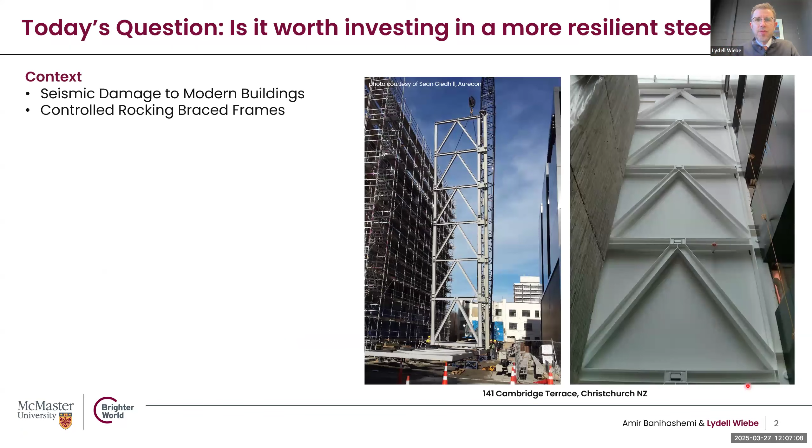The way I'm planning to look at that is first to provide a little bit of context, looking at what we expect for seismic damage with modern steel frame buildings, and a bit of a crash course on controlled rocking braced frames. I imagine many of you will not be familiar with them yet. Then I'll go into the method for this paper, the design archetypes we used, the modeling assumptions, and how we looked at repair cost. Then I'll dive into the results on structural performance, the seismic losses from both an intensity-based and a time-based perspective, and overall this cost-effectiveness question, before wrapping up with some implications and a shout-out to some related work.

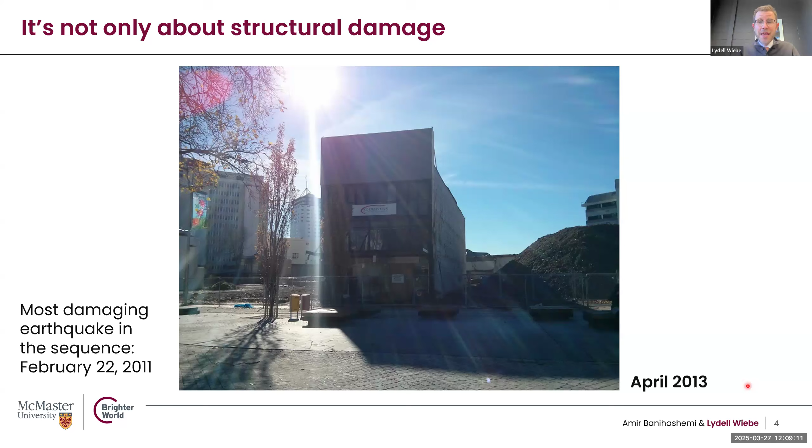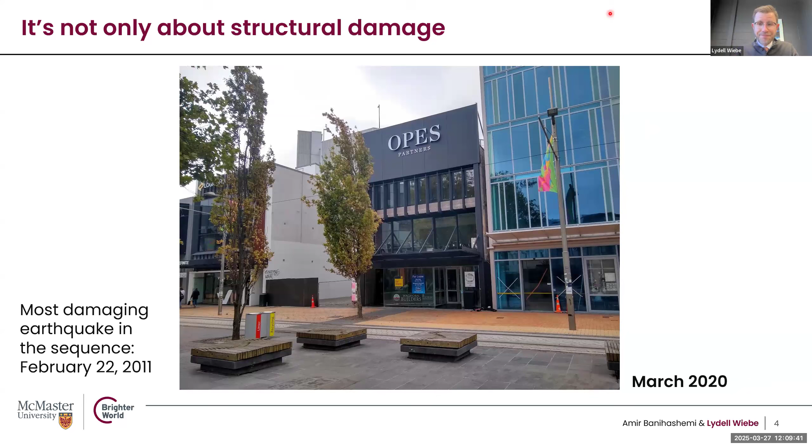I'm guessing now it's finally occupied. But just to drive this point that it's not just about the structural damage, we need to be thinking about more than that. Even though if we are thinking about structural damage, there's been this push for many, many years to look at more resilient seismic force resisting systems.

I picked a few of the many references that I could here. Base isolation, which is not the focus here, but I do want to mention it's also a really important way of looking to enhance resilience. Goes back at least 40 years. If I'm talking about rocking, which is the focus for today, back in the 70s, there was work in New Zealand about applying it to a rail bridge. There was a bunch of tests that were done in Berkeley.

The PRESS project was done in the 90s and kind of was a bit of a renaissance of these rocking systems. And so it's not particularly new, but it still hasn't quite gained full traction. And so we wanted to look at it here. To summarize how it works, I'll look here at a controlled rocking steel braced frame because our focus in this paper was on steel systems.

The idea of a rocking system is you're actually going to let the seismic force resisting system partially lift up from the foundation in response to earthquake load. So if we look at a structure like this, and I plot the force displacement curve, initially, if you start loading it up, it'll deform like any other braced frame until you overcome the pre-compression of the column. It doesn't know it's a rocking structure.

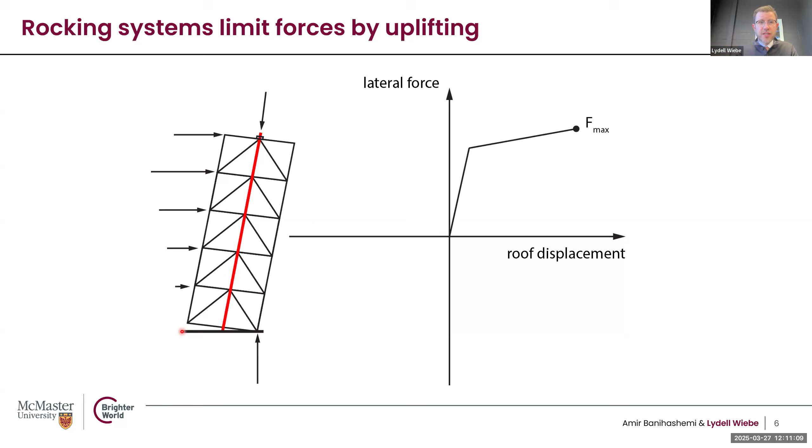But eventually you reach the rocking load, and at that point, when we reach zero force down there, now it's ready to start rocking. As you continue to push it, it will start lifting up from the base. That'll cause a softening response. And this positive stiffness would be contributed by post-tensioning. You don't always need post-tensioning, but it's commonly used in these controlled rocking systems, at least from a research perspective. The ones that have been built probably are more commonly without, but still plenty of examples with post-tensioning.

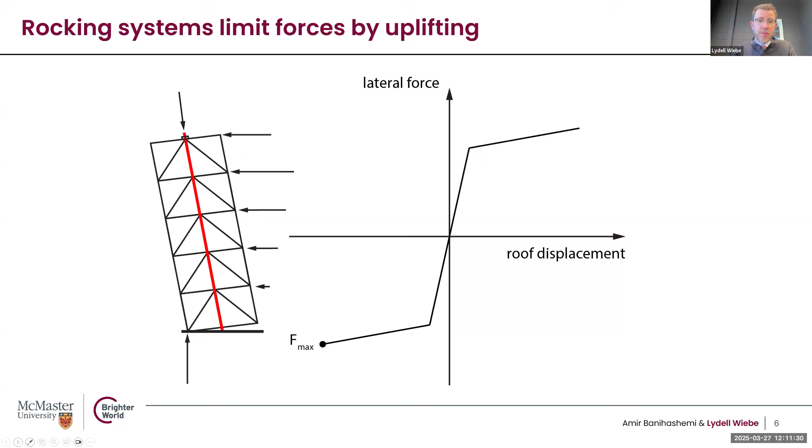If you unload it and go back in the other direction, you get this bilinear elastic response, which is characterized by this self-centering, where whenever the force is zero, the displacement is also zero. This as it is doesn't dissipate any significant energy. And so typically people will provide some form of supplemental energy dissipation that's activated by the rocking to enclose some area in the hysteretic loops. And so we get this characteristic flag-shaped response.

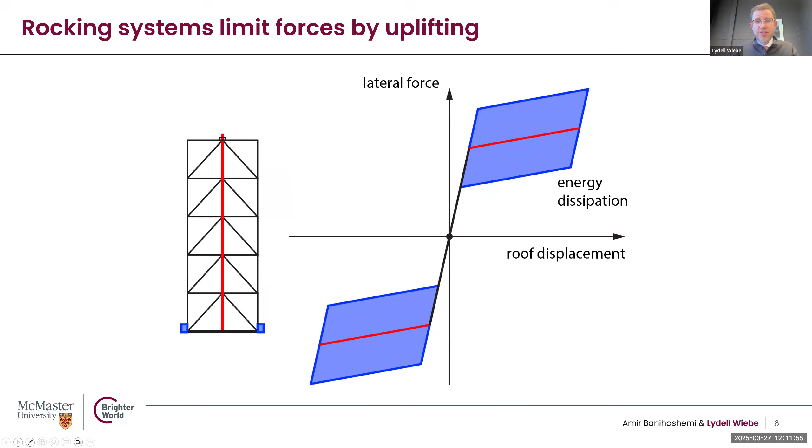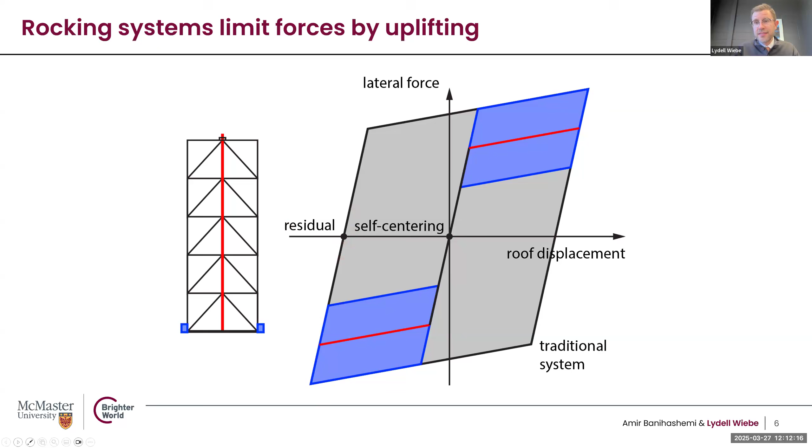If we compare that to a more traditional, more ductile system, which is what we're comparing in this paper, the energy dissipation that you'll see per cycle is quite a bit less. But we get the advantage of having this self-centering, whereas a more ductile system, if you unload from the peak drift, you're going to have a locked-in residual drift, which we associate with needs to demolish the structures.

As an example of this, I thought I'd show a video. This video is getting old at this point. This goes back to my PhD almost 15 years ago now. But this is shake table testing that was done. In the middle, you see the overall view of the 3-story frame that we tested at 30% scale, close-ups of the two corners. So you see it lifting up from the foundation.

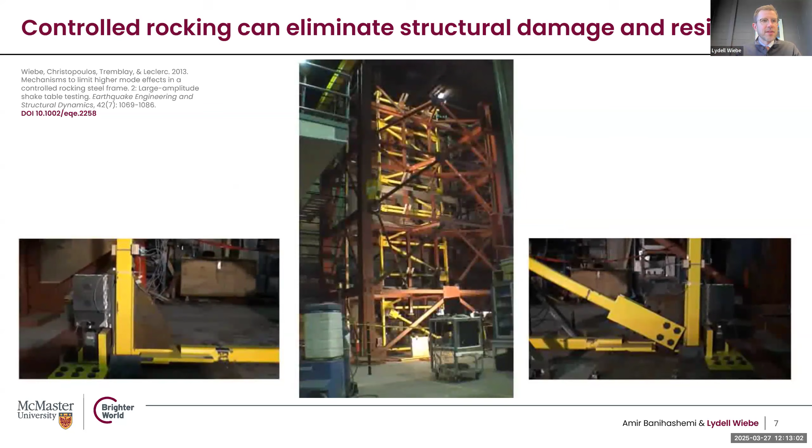For the test that we ran here, we used friction-based energy dissipation. You wouldn't have to do that in practice. Anything that'll dissipate energy should do the job. But this rocking response is softening things, but in a way that's not associated with damage. And so we can get the advantages of the nonlinear response without needing to have the structural damage that is typically associated with it. These have been built.

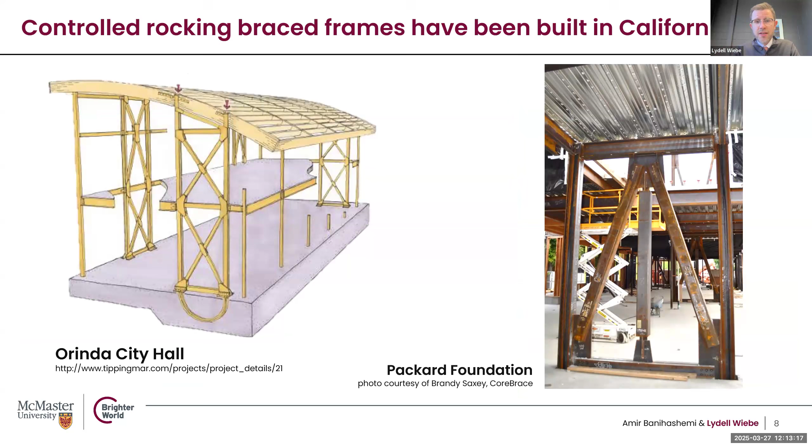In California, a couple of examples: Orinda City Hall, just kind of east-ish of San Francisco, designed by Tipping Mar, uses a rocking system. The Packard Foundation as well uses controlled rocking. In New Zealand, there are a number of examples as well. Two of them that I picked for this slide are Te Puni Village in Wellington and 141 Cambridge Terrace in Christchurch. Te Puni was built before the Christchurch earthquakes, but not really affected by them. 141 Cambridge Terrace was built afterwards. So the question of how it did during the earthquake is not something that we really know the answer to yet.

But they have been built. They're not codified, and so they're not common. Now, one of the things that people often wonder about is this impact that you have as the system is lifting up and then it feels like crashing back down. And as far as we can see, both like from the video that I showed you, we went looking to see the impact of that, forgive the pun, the impact of impact in that case. But it wasn't anything really significant.

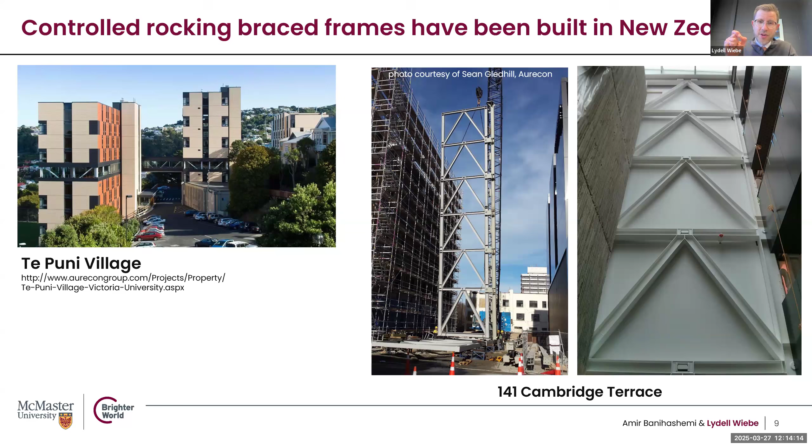You can see very large accelerations right at the point of contact, but those had dissipated by the time you reach the floor masses. Where we do start seeing some accelerations is more actually influenced by the higher mode effects, that just like a reinforced concrete shear wall, when you form this moment hinge at the base, that doesn't fully cut off the higher modes.

So this was some work done by another student a few years ago, looking at the floor spectra for controlled rocking braced frames. And what we see in this case is the peak accelerations were maybe a bit higher. And then we can have these large spectral peaks in an analytical model. How much that translates to a real system, I think, is very debatable, but we start seeing it in the model.

And so the question that this raised for us was, okay, we're avoiding structural damage by having a rocking system, but often our seismic losses may be heavily influenced by the damage to acceleration-sensitive non-structural components. And so do we need to worry that we are sacrificing them in order to get the structural benefits that we want? And if so, how does it play out overall? Is this a net benefit? And so that's really what was driving the work that's presented in the paper I'm presenting today.

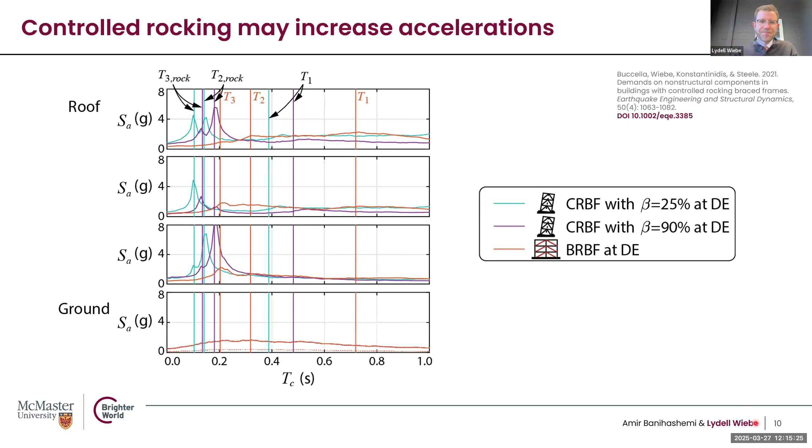So coming back to this question of whether it's worth investing, I'll now switch gears a little bit into the methodology that was used in the paper that's published in Spectra. 4 structural systems that we looked at. So we took one floor plan of a structure. We took it at 3 stories, 6 stories, and 12 stories for a site in Los Angeles with the parameters given there. And then we looked at 4 different seismic force resisting systems.

One of them was a steel moment frame. One was a concentrically braced frame. One was a buckling restrained braced frame. All 3 of those designed according to ASCE 7 using the current provisions. And then the 4th one is the controlled rocking braced frame. It's not codified, so we followed some design guidance that I had developed a number of years ago.

You still need to assume an R value, so it's nothing crazy to design. You're still following an equivalent lateral force procedure like you would for most systems, and we assumed an R value of 8. I think you could push to larger values of R, but we held it at 8 for the study.

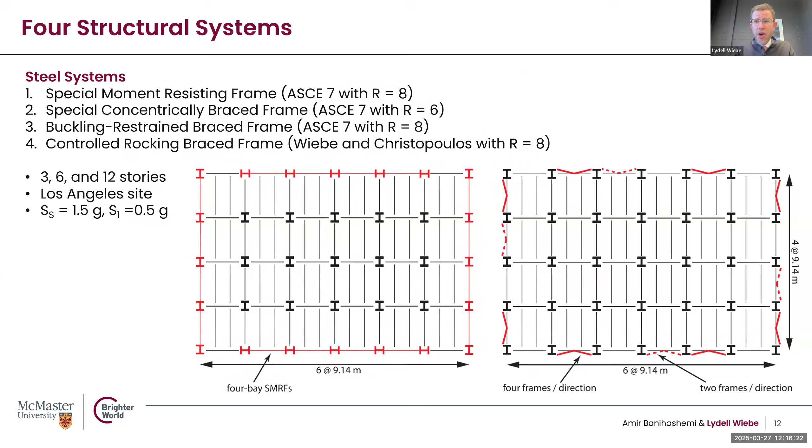Modeling, I'm not going to have time to go into detail because there were 4 different structural systems that all needed to be modeled. But just to highlight that it was all done in OpenSees, using reasonably advanced models that are trying to capture all the way to the level of collapse. So we've modeled things like fracture of braces, deterioration of beam column hinges, panel zone action, all of these things included in the models, and those are validated, but I won't be able to go into much detail on them today.

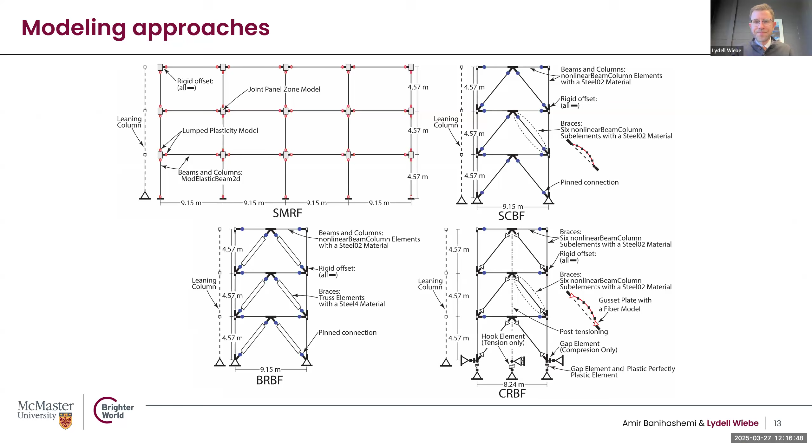In terms of estimating repair costs, we follow the P-58 methodology. The numbers available there are 2013 dollars, so these numbers are probably pretty low by today's standards, but $250 a square foot for the moment frames, $175 for the 2 different kinds of braced frames. And then there's a question of what do you assume as a construction cost for controlled rocking?

We assumed 2% more than the BRBF, which might be lower than you might expect, but honestly, from talking with the people who have designed the ones that have actually gone up, it's very hard to do a cost comparison without an actual project, but generally they're talking a couple of percent maybe, and in some cases even cost neutral to be able to use a controlled rocking system. This is not an astronomical cost increase, and so we thought 2% would be, if anything, probably on the high side of what the construction cost would be.

In terms of evaluating damage along the way, the fragility functions are mostly taken directly from the updated P58 database with a couple of further modifications. Demolition conditioned on residual drifts is an important consideration. We took a median residual drift for this study of 1.5%. That's higher than the default in P58. It follows another reference, largely because we didn't want to overly penalize the systems that we're comparing rocking to. So this is probably actually less favorable for rocking than a different assumption that you could make.

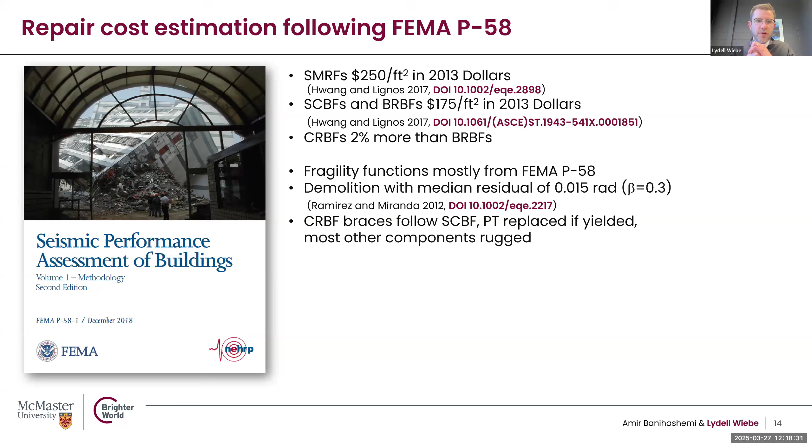For estimating damage to controlled rocking braced frames and how you would quantify that, the fragility functions there generally are following a concentrically braced frame, accounting for the fact that story drift is more coming from rigid body motion for a controlled rocking system than for a conventional braced frame. So that's captured in the model. And then the computations, most of them were done using Pelicun, out of the NHERI SimCenter. So that was our main computational engine for the work. For the loss assessment work, the actual analysis was all done in OpenSees.

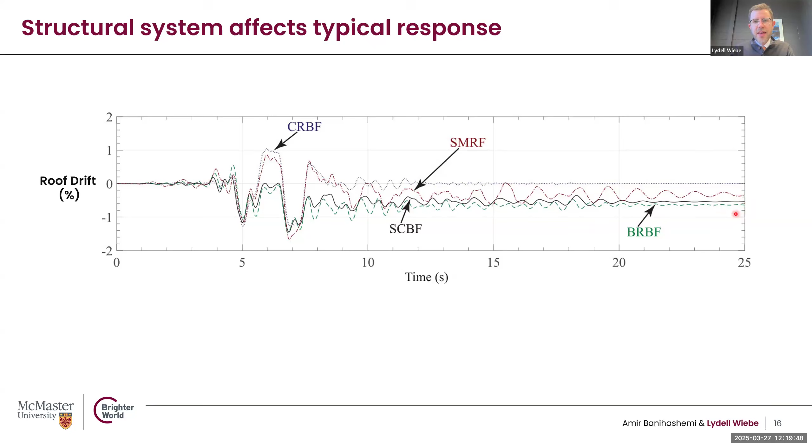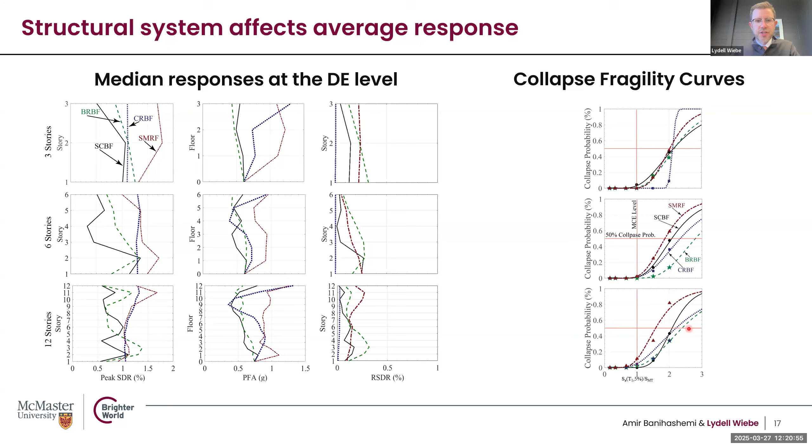Peak floor accelerations, it surprised me a bit, actually, that the moment frames were reaching the largest accelerations overall. That was generally because they were drift limited in design, which meant that the forces were not capped in the same way for the moment frames as they were for some of the other systems, and force is mass times acceleration. So if the force wasn't capped, the acceleration wasn't either. The residuals were essentially 0 for the controlled rocking system, and not huge at the design earthquake level, but still noticeably larger. And if we look at the collapse fragility curves, the vertical line here is showing the MCE. We're generally less than 10% probability of collapse. That's what you would expect and hope for. And then the collapse margin ratio is what you would expect.

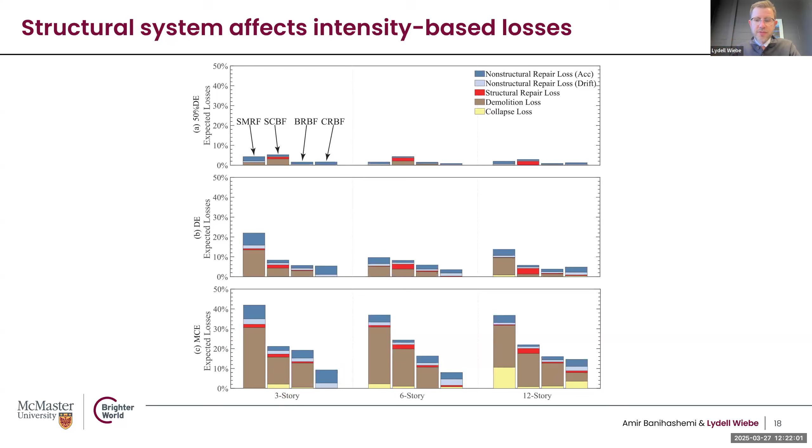Also, kind of as expected, the acceleration sensitive non-structural component losses are typically a bit more for the controlled rocking system at all intensities, but that cost is more than outweighed by the savings in demolition costs for the case where you have large residual drifts. And then if we integrate that through the hazard curve to look at time-based losses, what's shown on the y-axis here is the expected annual loss, we see the same trend where we have the least for the controlled rocking braced frame.

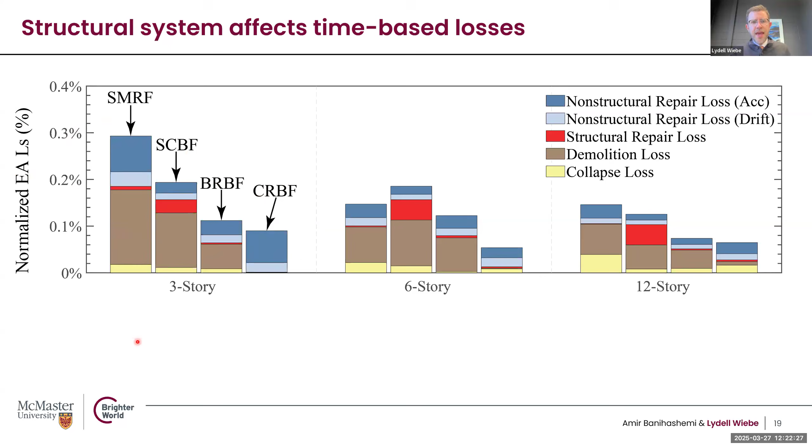None of these numbers are all that large, but it's lowest for the controlled rocking system, where some increase in acceleration-sensitive non-structural component loss is more than outweighed by the savings in demolition and, to a lesser extent, collapse losses. Then we also looked at kind of a cost effectiveness ratio.

And what we see is that in general, there are some savings. These are not huge savings. There are other higher risk endeavors that you could take to make more money, but it's coming out positive over the lifetime of the structure. This is a net win.

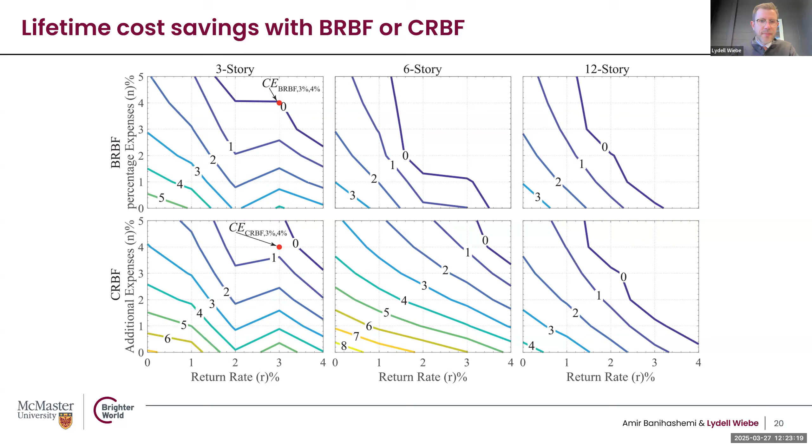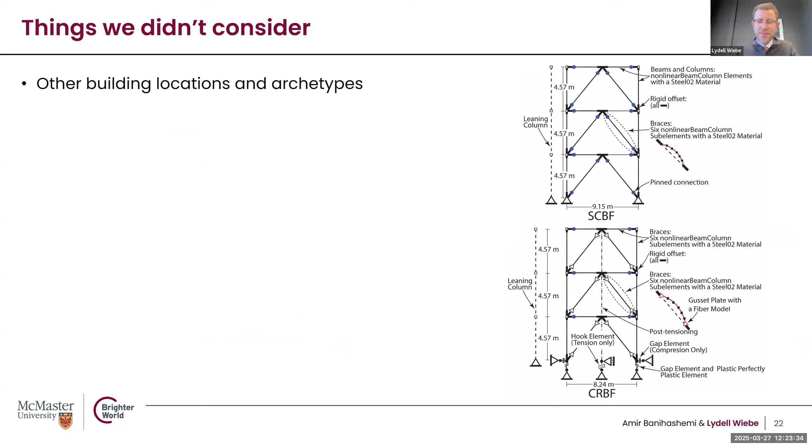So revisiting then this question of, is it worth investing more in a more resilient steel seismic force resisting system? Before capping that one off, I do want to highlight things that we didn't consider, because there were lots of them. We looked at one building location and archetype, 3 different heights, but one floor plan. We didn't look at modeling the gravity framing, which tends to reduce the residual drifts that you have. It's in there for P-delta effects, but not for the effects on the lateral resistance. We had one damping model that we had to assume.

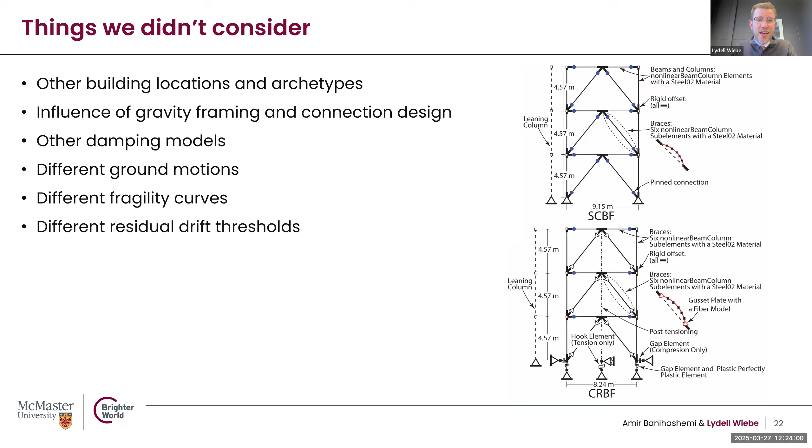We have one set of ground motions that are probably a little bit on the high side relative to a conditional spectrum. The fragility curves are all baked into FEMA P58. Those are questionable. The residual drift thresholds, again, that's an assumption. So there's lots and lots of pieces, consequence functions as well. And one time horizon; we assumed 50 years.

And then one that I really wanted to highlight is indirect losses. All of this is based on the direct cost of repairs as estimated according to FEMA P58. But often it's the time that you're out of the structure that is more important than the repair cost. And so that's something that's not included in this study.

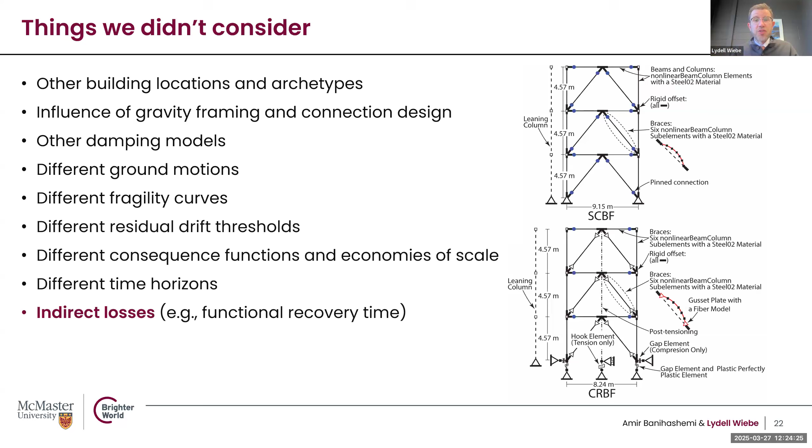But with all of those caveats, is it worth investing in a more resilient steel seismic force resisting system? My one-word answer would be yes. I think that the controlled rocking systems can be cost effective in the long term. And we didn't know that going into this. We honestly were not sure whether potential increases in acceleration-sensitive non-structural component losses would outweigh the benefits. And it seemed that things were looking good for resilient systems here.

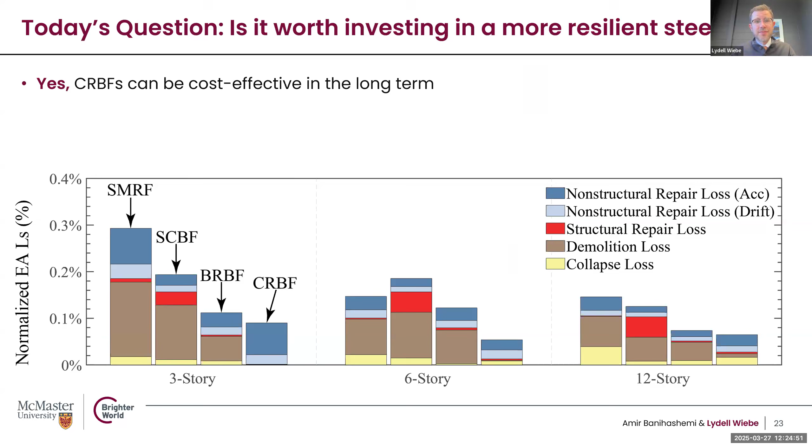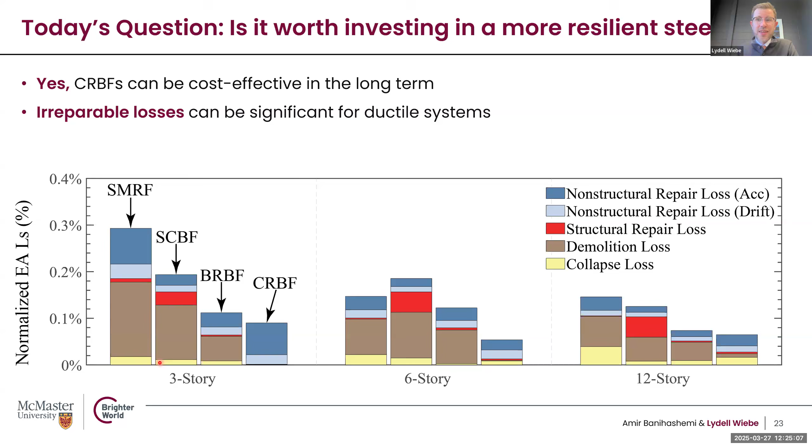But I do want to highlight the irreparable losses, what we called demolition and collapse. Those are things where you can't fix non-structural if you have to demolish your structure. And those can be very significant for the ductile systems, even if it's in a very large earthquake. Over the lifetime of the structure, that can be significant.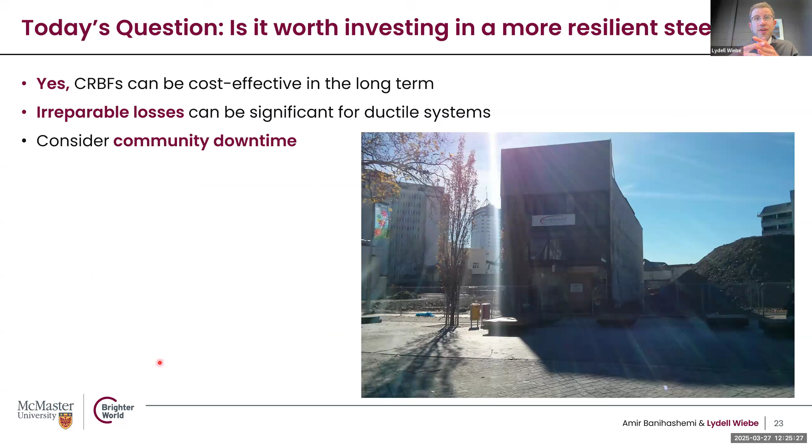Just before wrapping up, one last thing that I wanted to highlight. If you were interested in this paper, I'd like to highlight a couple of other papers written by the same authors, with Amir and myself. In one, we took a similar methodology and looked at the lots of dials that you can turn on the design of a controlled rocking system, looking at how you would optimize them to reduce the losses.

There's another paper here looking at how our fragility curves for acceleration-sensitive non-structural components are all based on the peak floor acceleration. But as a structural engineer, I use the peak floor acceleration for almost nothing. Usually I am using a spectral acceleration. And so applying that thought process to our fragility curves is a paper that we published as well in EESD. And then finally, getting into the weeds on consequence models in FEMA P58 and economies of scale there.

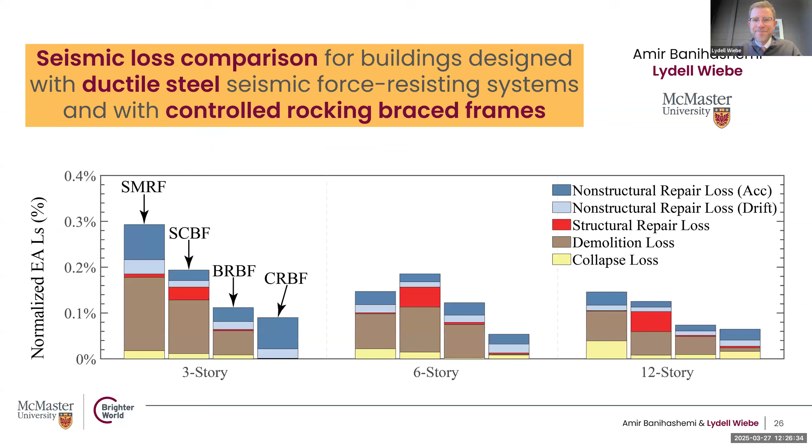Thanks so much. Thanks, Lydell. Awesome job there. And thank you for sticking to the time. Really appreciate it very much.

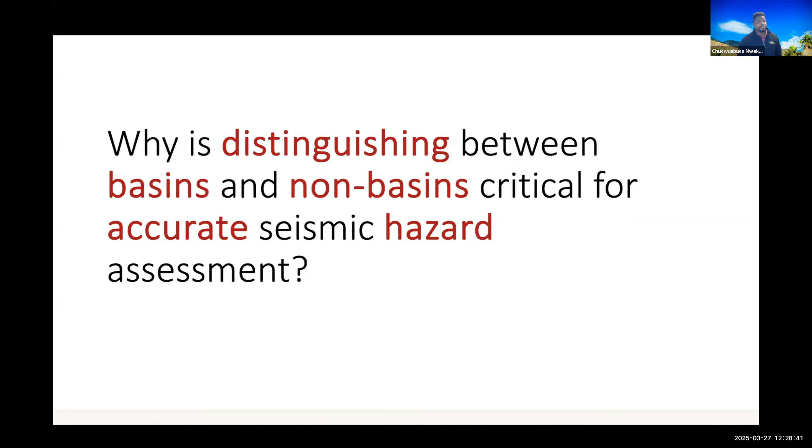So the first question, which is a fundamental question to ask regarding this paper, is why is distinguishing between basins and non-basins critical for accurate seismic hazard assessment? Well, these 2 videos here should provide some understanding of why discerning between basin and non-basin sites is important. On the top right, you're going to see the displacement history of 2 GPS sensors, one in a non-basin environment, which would be a purple circle, and the other in a basin environment, which would be a gold circle.

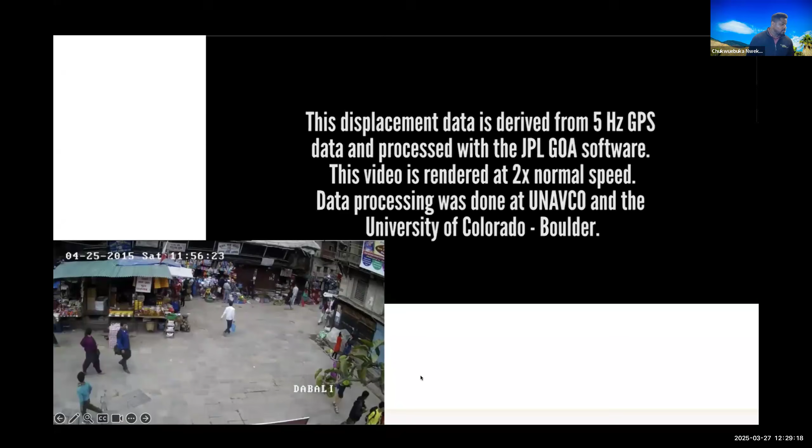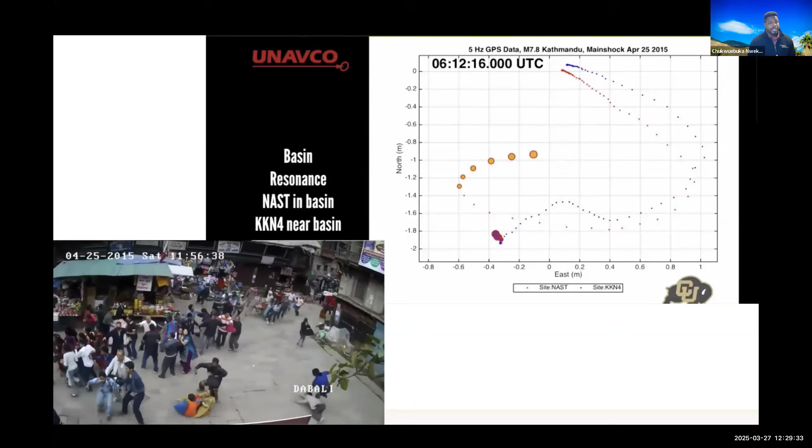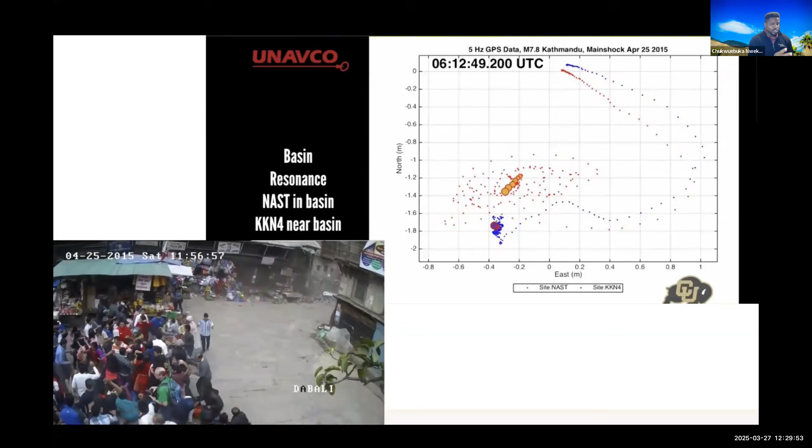And you'll see in the video in the bottom left what that looks like in real life and how that can be quite disorienting. For this video, there wasn't any damage in this location, but not too far away, there was a lot of damage and people lost their lives. But this is just showing you the differences for the same earthquake between two different site conditions. And some of you will ask, okay, what's the cause for these differences?

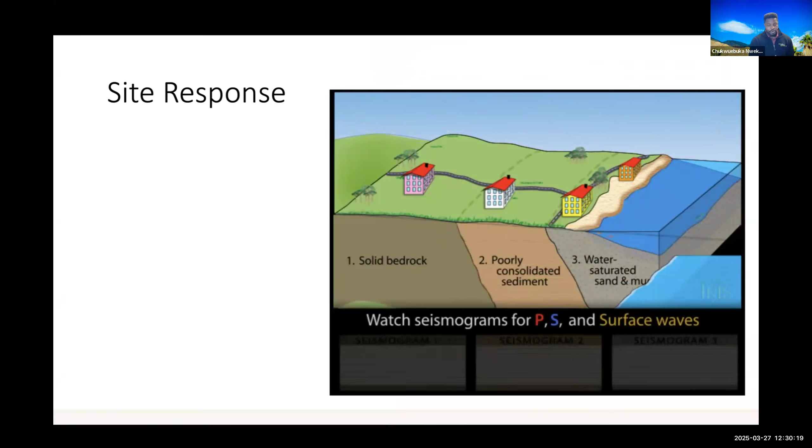Well, in a simple way, the cause for these differences essentially is site response, right? So here in this video, we're showing the impacts of site response relative to building performance and ground conditions for the same earthquake event. You see 4 identical buildings founded on 4 different site conditions: bedrock, poorly consolidated sediment, sand and mud, and in this case, supersaturated sand and mud.

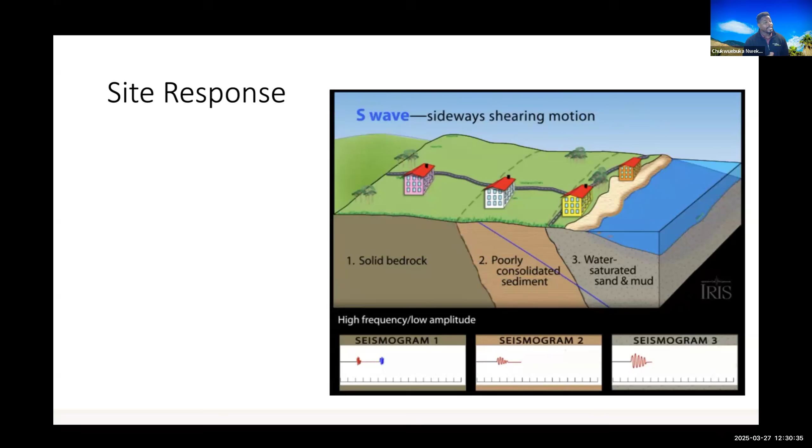And what you see is that the P and the S waves and the surface waves, as they pass, will manifest as different amplitudes and intensity depending on site conditions, so much so that the impacts on the buildings will be different. In this case, the S waves and the surface waves, which are pretty critical for engineering design, will lead to drastically different building responses and building damages as you go from competent to less competent site conditions, as you can see right here.

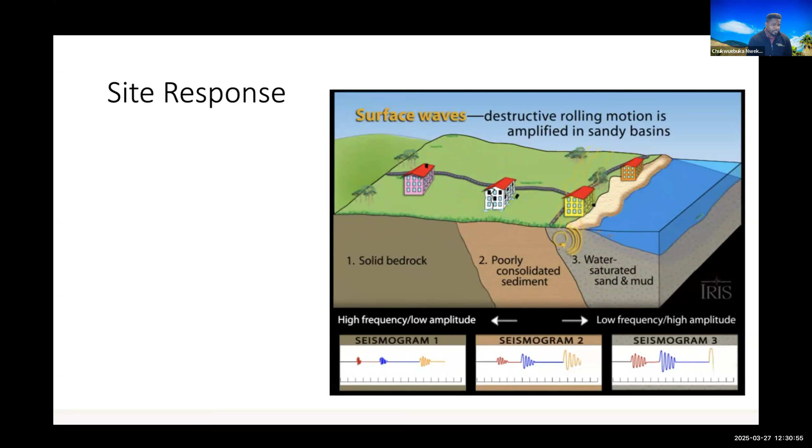So I guess from this level, as you're seeing these differences in the example of what's going on, the next question you will ask is, what is site response? Well, the way I've defined site response is the alteration of seismic energy due to variations in the properties of the subsurface geologic materials, so sediments and rocks that we've seen.

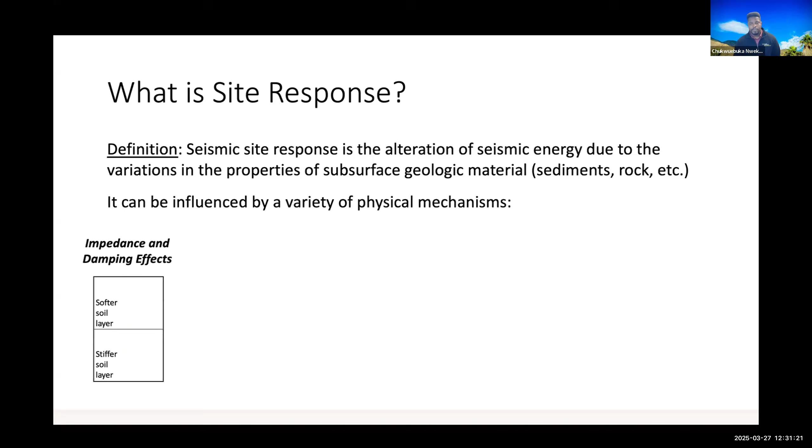These things can be influenced by a variety of physical mechanisms, and this includes impedance and damping effects. Going from a stiffer material to a softer material can lead to increases in amplitude. Resonance effects, where if your structure or your system has matching frequency content to the energy of the seismic wave, you might have coherency and further amplification.

You also have topographic effects that are included in site response, which show that the shapes and orientation of certain things can lead to focusing, trapping, dispersion, and constructive or destructive coherence. And then the last one, which we call geometric effects, basin effects, which says that we have 3D effects that can create a little bit more craziness.

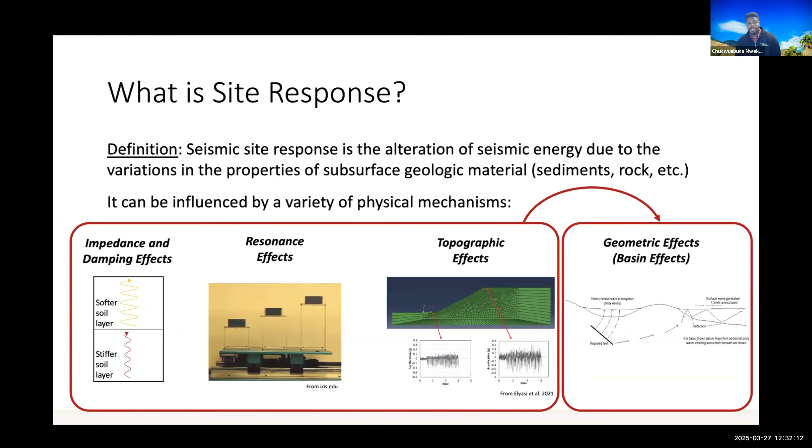In actuality, these three effects are buried within the basin effects, because the impedance and damping effects going from bedrock to basin, and within basin, are going to change. The resonance of each basin is going to be different, and the shape of the basin will act as topographic effects. So these things are all embedded within site response. So the next question is, how do we currently model site response in sedimentary basins, and what's the key limitation?

So here I'm going to show you an example of what I call basin effects mechanism, site amplification physics. This shows how, in ground motion modeling, we partition the contributions into bins, as engineers love to do. The first thing is a source component, which is a function of magnitude, telling you how much energy, and the faulting, which tells you what kind of thing produced the energy.

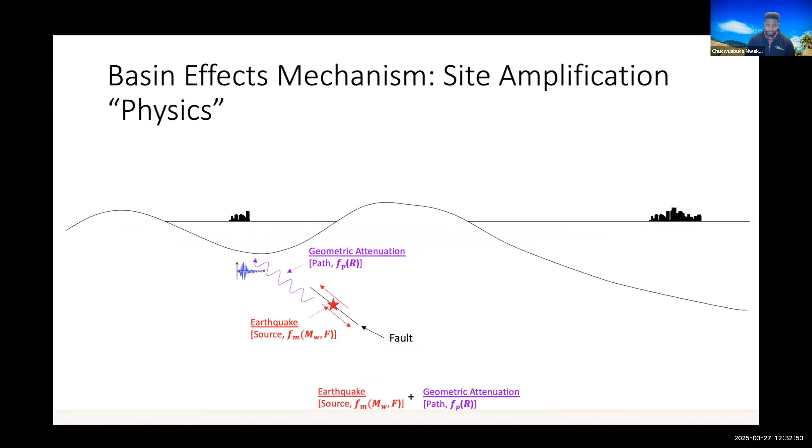The next thing is the path, which tells you what's going on between the source of your energy and close to your site. Once you get to the site, you have contributions from the deeper portion of the basin and shallow portion of the basin, that can be focusing and resonance and the like. So this is what we do in quantifying what's going on with an earthquake at a site.

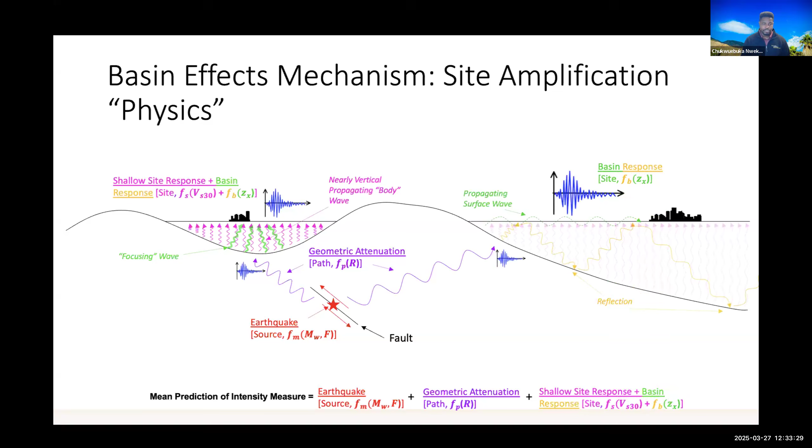Another situation is the earthquake traveling a long distance and entering the basin, and you can still have your resonance, but you could also have reflections bouncing back and forth that lead to generation of propagating surface waves. These propagating surface waves will further increase your ground motion intensity and add to the estimation. So the question now is, how do we do this specifically for basin effects in ground motion models? Well, in ground motion models, we look at the site effects.

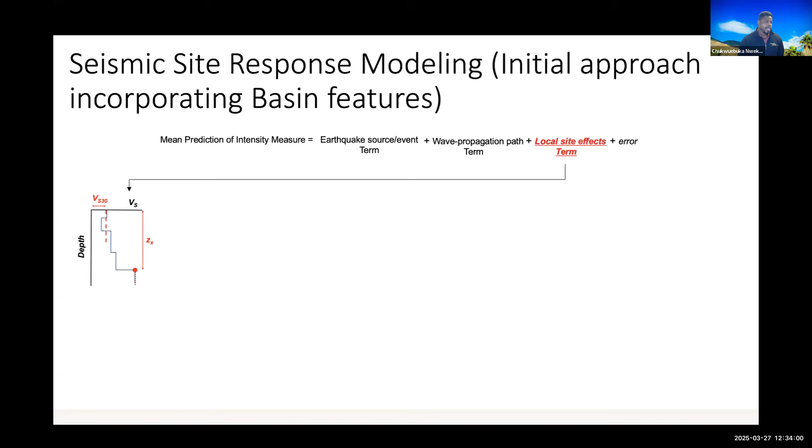We use some measurement of the subsurface condition, in this case shear wave velocity measurements. From these we parameterize into VS30, the time-averaged shear wave velocity in the upper 30 meters, and a basin depth, which is the depth to a particular surface horizon or shear wave velocity, like 1,000 meters per second. These two give you a representation of the stiffness and strength of your site and the amount of material that's going to be affected by these amplifications.

The VS30 itself gives you a first order scaling as a function of period, while the basin depth gives you a second order amplification relative to that VS30 amplification. So it tells you, if you have more or less material, how we're going to amplify. To do this quantitatively, you realize these two parameters are captured from the same measurement, so in some cases they're correlated.

So in order to isolate that, we have to establish a relationship between the VS30 and the basin depth, and use that relationship relative to our data to create a differential. This differential is what we use to relate to site response amplification, such that if you have a positive differential, you're going to amplify relative to the VS30 case.

And if you have a negative differential, you're going to de-amplify relative to the VS30 case. So that's kind of how we capture these basin effects. If you notice, though, throughout this whole thing, I have not mentioned if you're in a basin or not in a basin. So this approach assumes this is consistent for all sites, which now we know is not necessarily the case, right? So if you're in the basin, you're going to have different behaviors than if you're not in the basin. And you have to be able to separate the two to be able to understand what's going on. So we did just that.

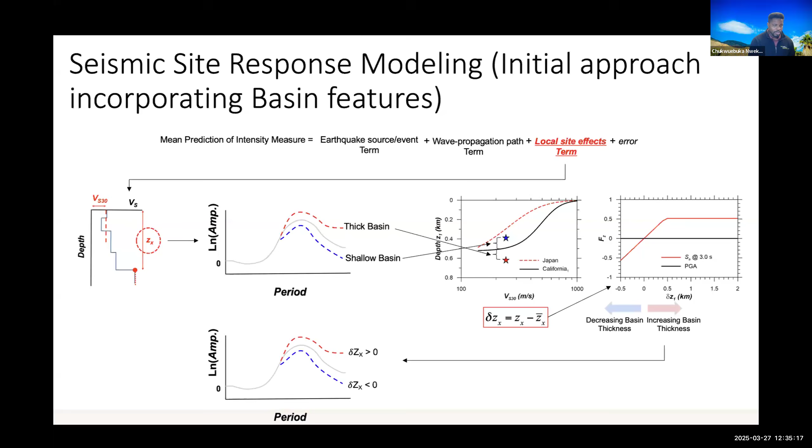We went through with a panel of experts, and we went through every ground motion station in Southern California and assigned them as basins or non-basins. So the red circles and the purple triangles. And in addition to that, we also assigned intermediate sites, which is the basin edges, so close to the margin, or valley sites that we call smaller basins, which essentially are smaller sedimentary structures. And we did this in an iterative fashion with experts to essentially establish this.

And we saw fruitful things in our paper that's also published in Earthquake Spectra for site response in basins in 2022. And what we did here, some will say, and which is true, it's somewhat subjective. So different analysts may have different views on what is a basin or basin edge versus non-basin or valley versus basin. So our goal for this paper was to develop a quantitative means to be able to repeat this classification system such that it is not subjective in any way. And the question now we have to ask is, what can we use as an indicator that can replicate what we did from a visual standpoint?

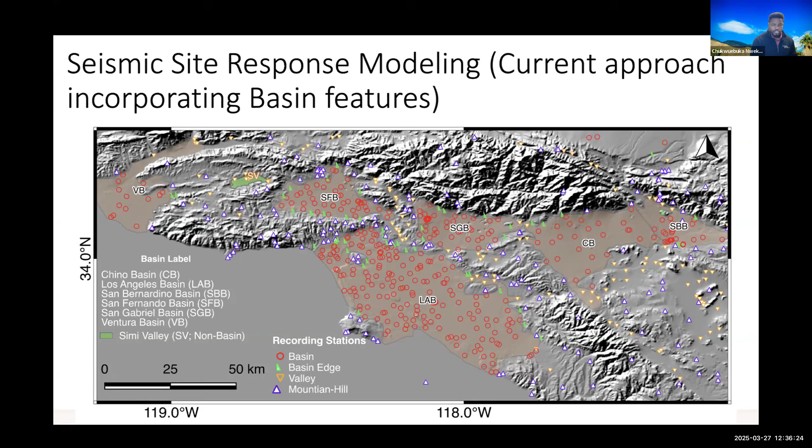And we went through a suite of parameters and came to the conclusion that surface texture was the best way. But overall, this is kind of the criteria that we use to identify basins. So it has to be within a large flat region. Edge has to be within some margin distance of the edge. Valley is a smaller version, and Mountain-Hill pretty much has high topography.

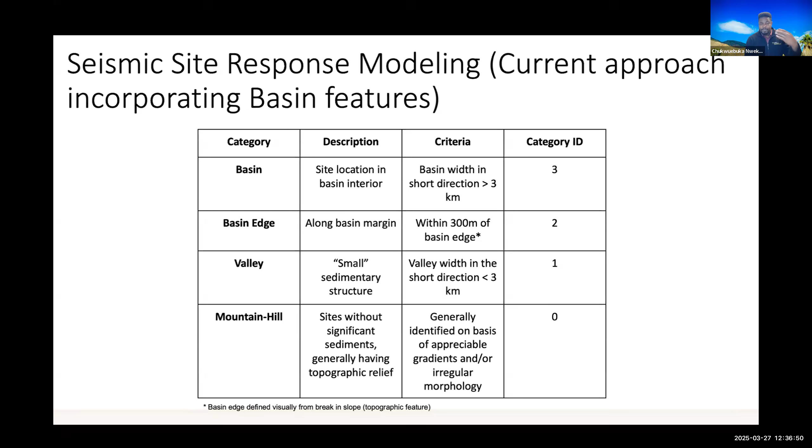So why was surface texture selected as a primary feature? Because I believe surface texture was what did the best job of replicating what we saw as analysts with our eyes. So that's the question that we wanted to ask. Why was surface texture selected as the primary feature for basin classification? Well, in order to do this, we have to essentially go through a suite of features.

So we started off looking at elevation. And we use elevation because when you look at elevation, this is a digital elevation model of Southern California, you'll see, if you remember those boundaries for the basins, that the basin locations are typically low-lying relative to the other non-basin features. But if you look closely over here, I don't know if you see my arrow, you'll notice that the LA basin, which is relatively deep relative to the San Fernando basin, has slightly higher values because the color is slightly brighter, right? And you can look at the Mojave Desert as a relative basin as well and see that's also high elevation. So this is indicating that elevation may not be the best classifier for basin, non-basin conditions.

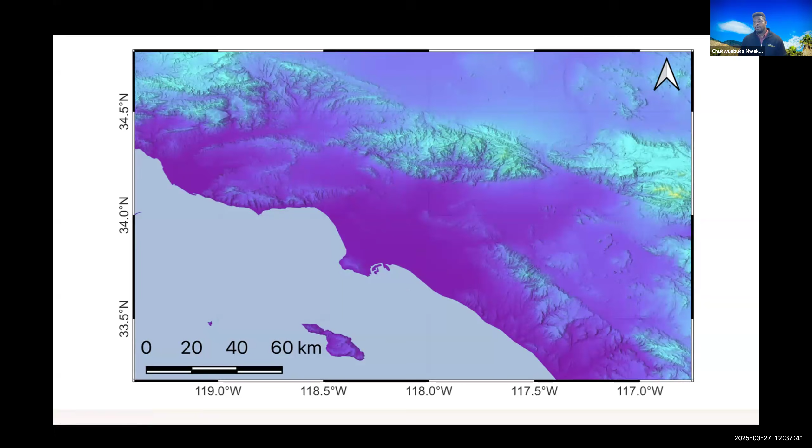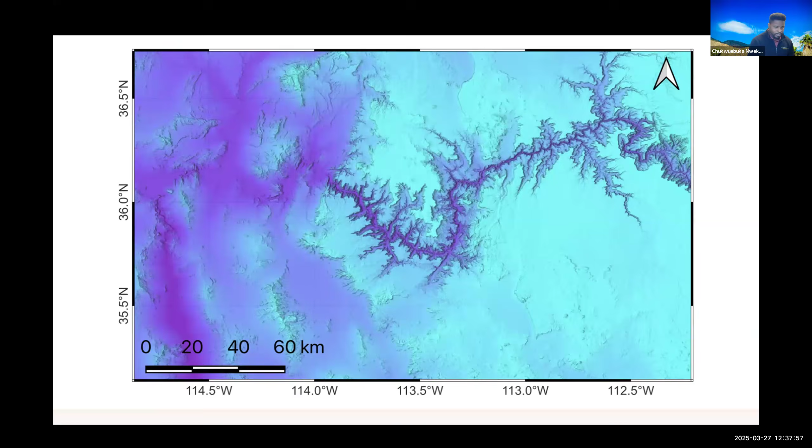And this can be proven when we go to the Grand Canyon. We have the same flat, low-lying areas that we would consider basins, but this is not a basin. These are sedimentary rocks that are outcropped. So again, this is just showing that elevation is not going to be a good indicator or classifier of basin, non-basin. So we went forward and we said, let's look at the ground slope. So we essentially established the ground slope for the region.

And what we see here is that on average, the slopes that are low are within basins, the slopes that are high are outside of basins. But if you notice, within these basins, there are some regions that have high slope values, right? And there are also some regions within the non-basin regions that have low slope values. So again, though it does a better job, it's still going to suffer from confusion and nuances between basin and non-basin classification. So we decided, okay, the slopes may not work as well, so let's look at curvature.

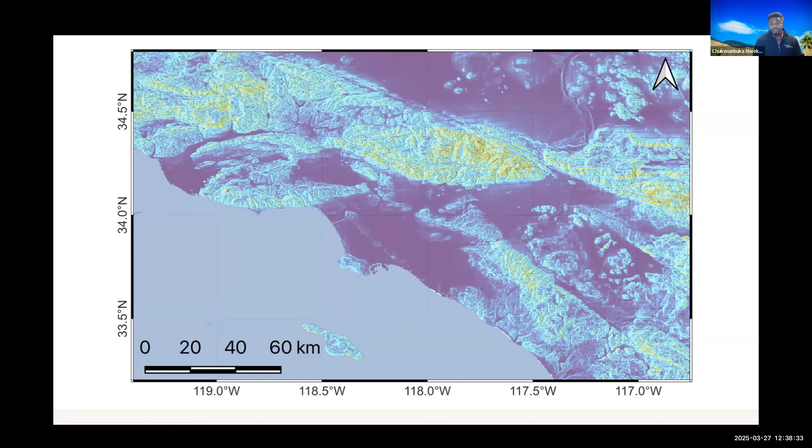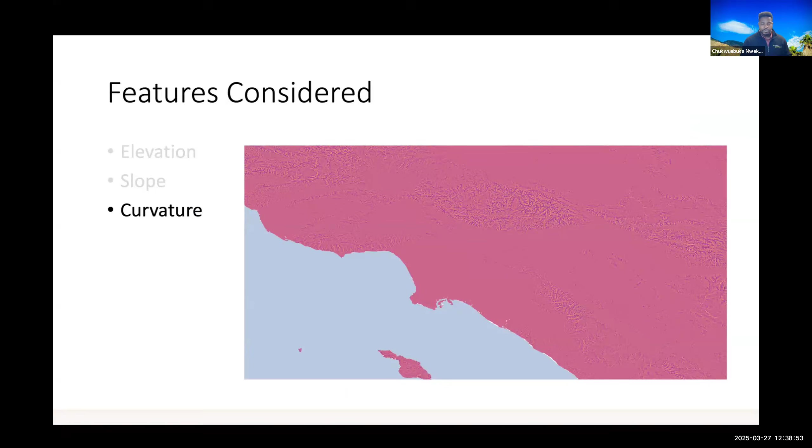And we found that curvature, worse than slope, could not do a good job. Because when we look at curvature, this is general curvature, the blue and the yellow and the reds show either really positive or negative high curvature values, so convex or concave, versus the pink, and what you see there is pretty much no curvature. And that pink is prevalent everywhere. So you can't use curvature to discern between basin and non-basin. It's not going to work really well.

So we chose surface texture. And what do we mean by surface texture? We define surface texture as the standard deviation of the ground slope over a given radius. So here we have a moving window that we move, and we calculate at the center of that point the standard deviation of all the stuff within that moving window. And the radius could be bigger or smaller depending on what kind of resolution you want for your surface texture to be in.

What this is essentially saying is that if you're within the basin, the standard deviation at the center of the basin should be low, so your surface texture should be low. Versus as you get closer and closer to the edge, and you start to pick up these non-basin features, your standard deviation of the slope will go up, so your surface texture will go up. And if you go to a non-basin location, you should have high surface texture because you have high standard deviation of slopes, right? So this is trying to capture a smoother representation of slope such that we can use that as a classifier. And we found that it does a good job.

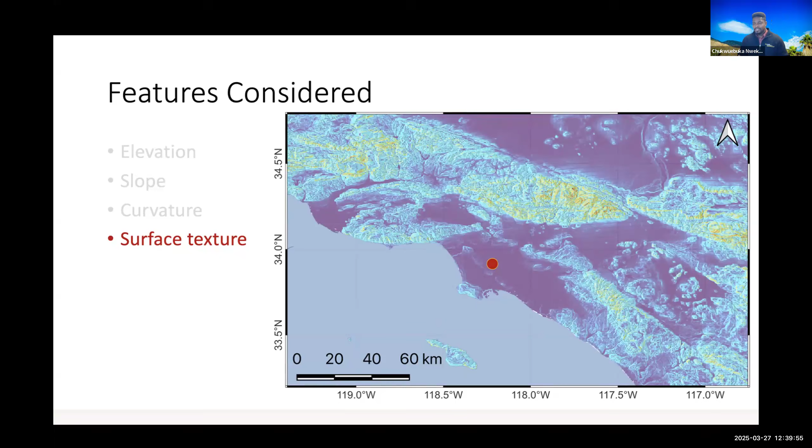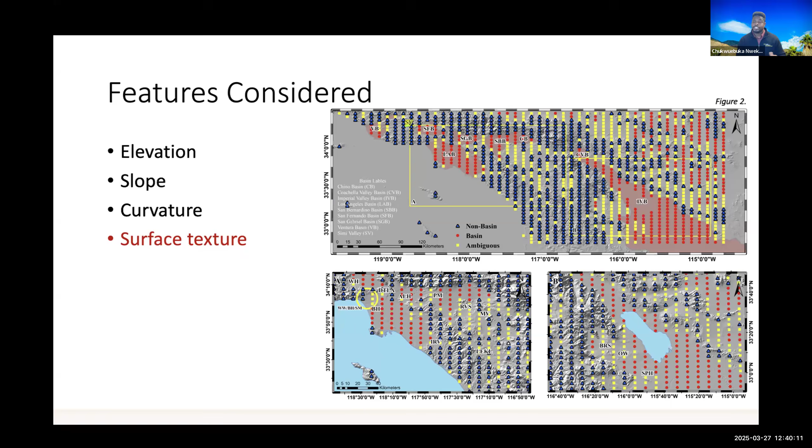Now, I mentioned that the radius can vary in size. So we actually did a PCA analysis that included surface texture of different radiuses, and we found that 1.6 kilometer to about 2.5 kilometer works best. So we stuck with those two as they both captured most of the variance in the data.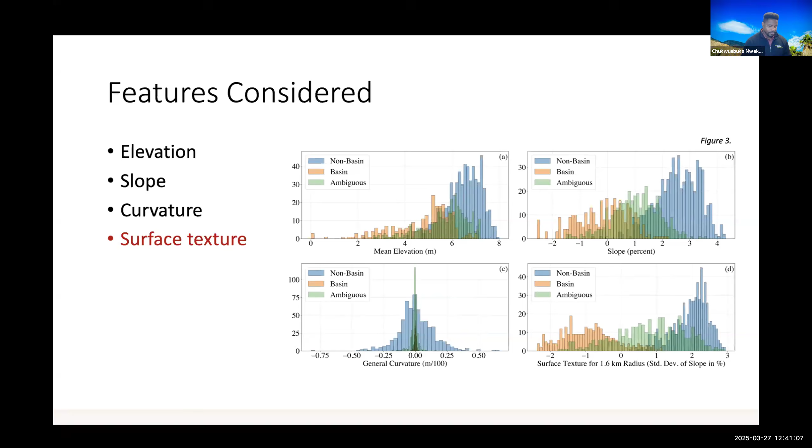So now that you have the feature that you want to use, the question is what algorithm can provide the most effective and practical classification model? Because again, we want this to be practical such that people can use it in a robust manner. And how was this determined?

As far as the machine learning algorithms are concerned, we chose a suite of algorithms such as logistic regression, which essentially is a binomial classifier that uses likelihood to determine the chances of being in one group or the other. We use k-nearest neighbor, which is a distance-based classifier that's hinged on clustering. SVM we use as a separation-based classifier that partitions data into effective groups. Decision tree is a classifier that operates on hierarchical cascading criteria assessments.

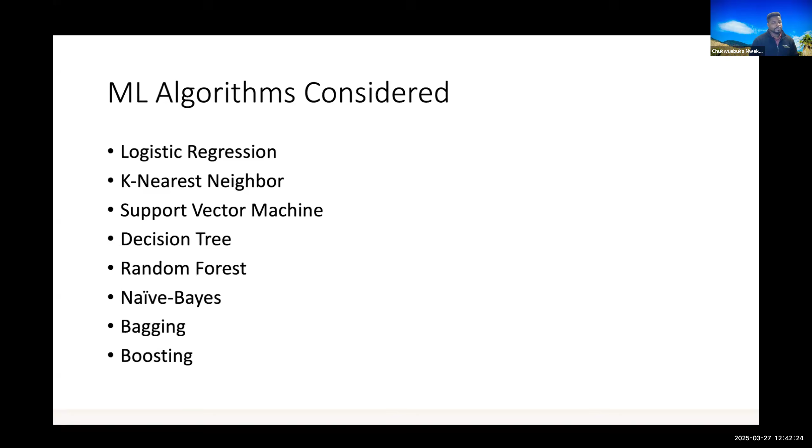And random forest is a collection of decision trees that's aggregated and averaged, kind of like a weighted average. Naive Bayes is another likelihood classifier that's based on observed features, but assumes that features are conditionally independent. And then we have bagging and boosting. Bagging is an enhancer that uses bootstrapping, random sampling, and boosting is a sequential training enhancer that we use to reduce the bias in our model. So we used all these algorithms to try and develop a classification model.

And the metrics we used to assess these were recall, precision, F-score, receiver operating characteristics, and area under the curve. So these are typical things that people use in the machine learning data science space. And as far as the recall, precision, and F-score are concerned, those combined can give you a good understanding of what's going on.

And the outcome of that, you see here, is a spatial map that shows the probability of being in the basin as far as the color grading, where lighter colors, yellow, is 100% chance, a high chance of being in the basin. Darker colors are essentially very little chance of being in the basin, or high chance of being in a non-basin.

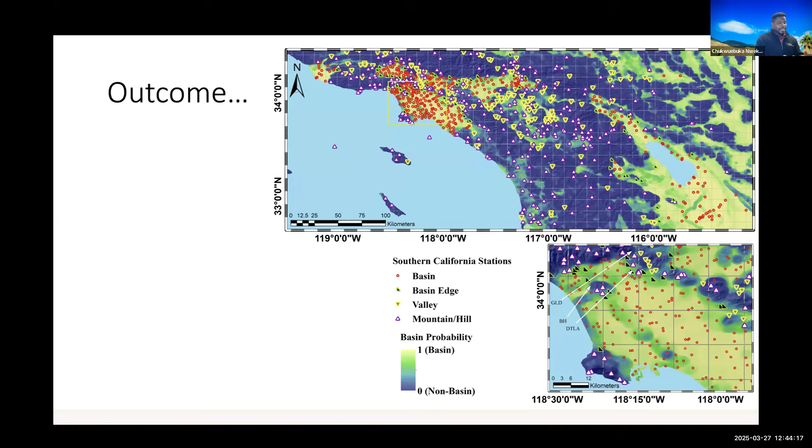And when we compare it to the expert data that we had earlier, with the red circles as basins and purple triangles as non-basin, you see that these things overlap relatively well. So this is saying that the model is doing a good job, right? And again, remember, this model was developed not on this data, but on data that was queried on basin and non-basin. So we've seen that we're doing a decent job.

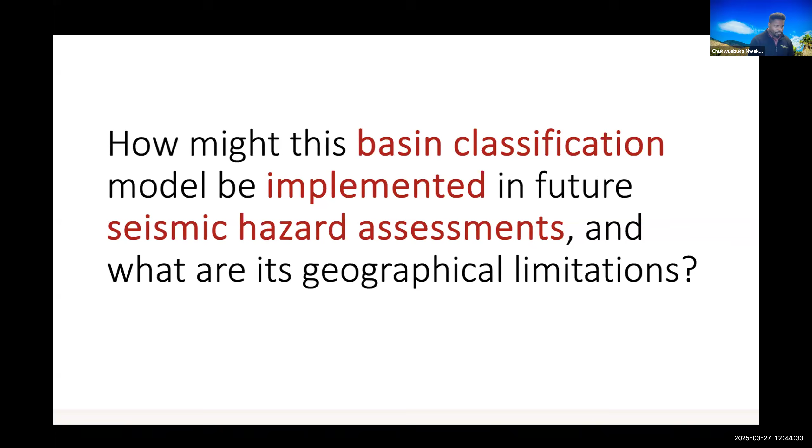Now, the next question you might want to ask, as our last question, is how might this basin classification model be implemented in future seismic hazard assessments? And what are its limitations? So the first place that this will probably provide significant value is the National Seismic Hazard Model from the USGS.

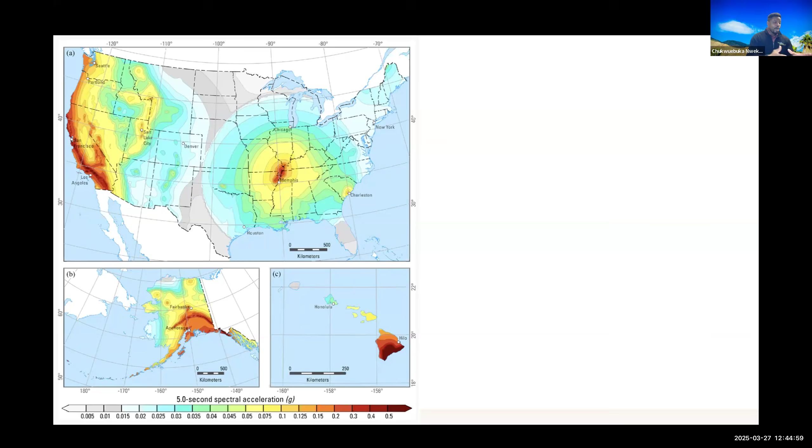And this is important because in developing these models, they use semi-empirical models and simulations and a few other things to develop their estimates of intensities for given earthquake scenarios. And knowing whether you're in a basin or non-basin, as you saw earlier, is important because that tells you how things are going to amplify. So this classification model can help in guiding the estimates for these analyses. And once you're able to do that, you're able to provide better representations of the probability of shaking and hazard going forward.

So what are the limitations and future endeavors? Well, the major limitation is that this classification model is hinged on surface texture. Surface texture is a geomorphological feature that is hinged on the ground surface. So anywhere that has basins that do not adhere to the same conditions as Southern California, i.e. glaciated regions where a glacier has carved the surface, and even though it's a basin you have significant topography, the classification algorithm is not going to perform well in that region.

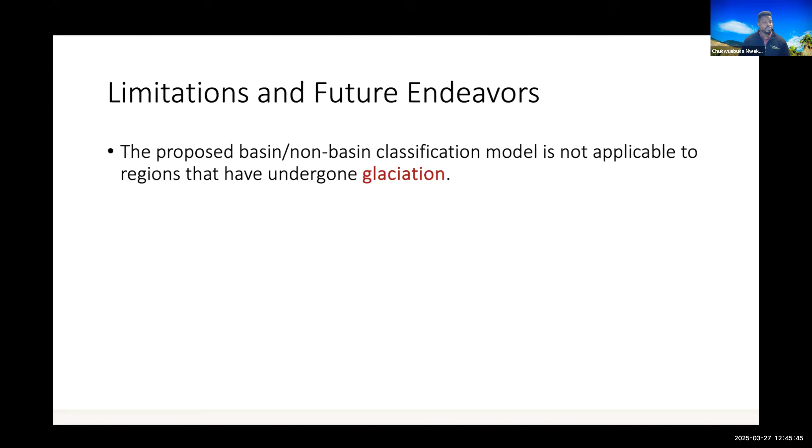The next thing that we would like to do is investigate the effects of length scale, or what feature length scales look like, and causal associations, whether it's correlation or causation, as well as trying to regionalize the model to see if it can perform better. So those are our hopes and our dreams that we're going to be working on to try and improve what we've done so far.

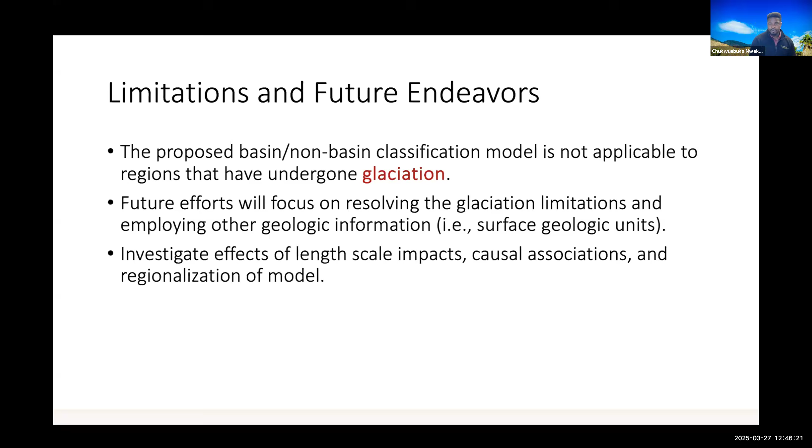Now, I want to ask, what can I clarify, elaborate on, and further explain?